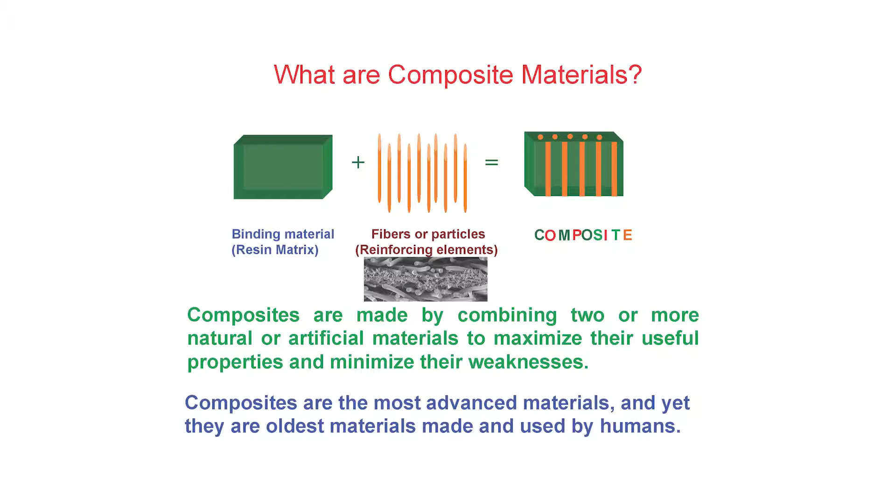First of all, what are the composite materials? Composite word is the composition. So basically this is the composition of a binding material, which may be like a resin, most probably polymer, and different kinds of inclusions, which may be fibers or particles, which make the composite. So they are made by combining 2 or more natural or artificial materials in order to maximize their useful properties and minimize their weaknesses. And of course they are advanced materials, but yet analysis shows that they are actually the oldest materials humans used in history. And I will show you several examples.

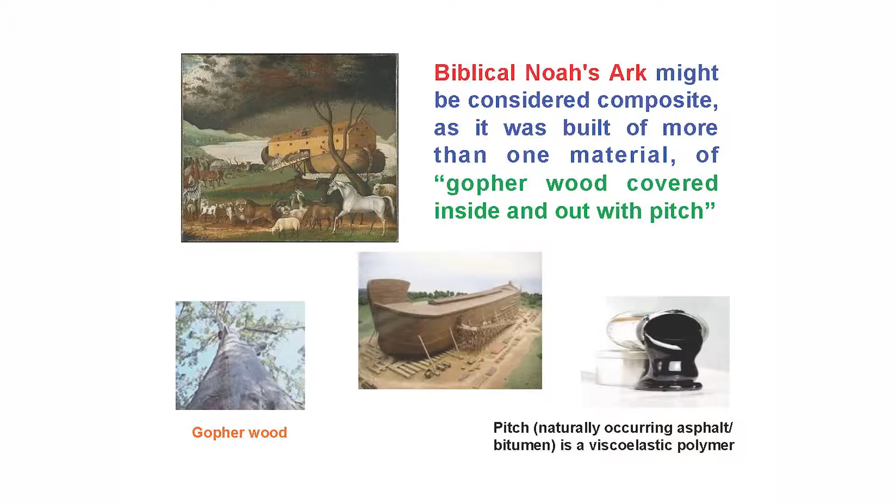Now, interestingly enough, I spent some time in Italy last spring, and I was at the University of Bologna talking to different people, including philosophers and historians of religion. They told me, check the Bible. What about this Noah's Ark? As a matter of fact, the Bible says that Noah's Ark was built out of gopher wood, covered inside and out with pitch. Now, this is wood, and the pitch is basically a viscoelastic polymer, a natural viscoelastic polymer. So basically, Noah's Ark, if it was built, can be called a composite structure.

Moreover, an interesting thing about the Tower of Babel. As a matter of fact, what the Bible says is literally the following: Come, let us make bricks and burn them thoroughly. And they used brick for stone, and they used tar for mortar. So basically, it was not a stone structure, if it ever was, but it was actually a composite structure made of bricks made of composites plus the tar. So pretty much a modern type of composite structure. All right, so let's get now to our nowadays advanced composite materials.

So today, let's start with classification. What types of composite materials exist? The first type is called laminated or laminar composites. This composite material consists of two or more layers of different materials that are bonded together, right? So that makes a laminar composite.

Another type, fiber reinforced composite. This is material with chopped or continuous fibers embedded or bonded by a binder material, which normally we call matrix. So matrix bonds fibers, either chopped or long fibers.

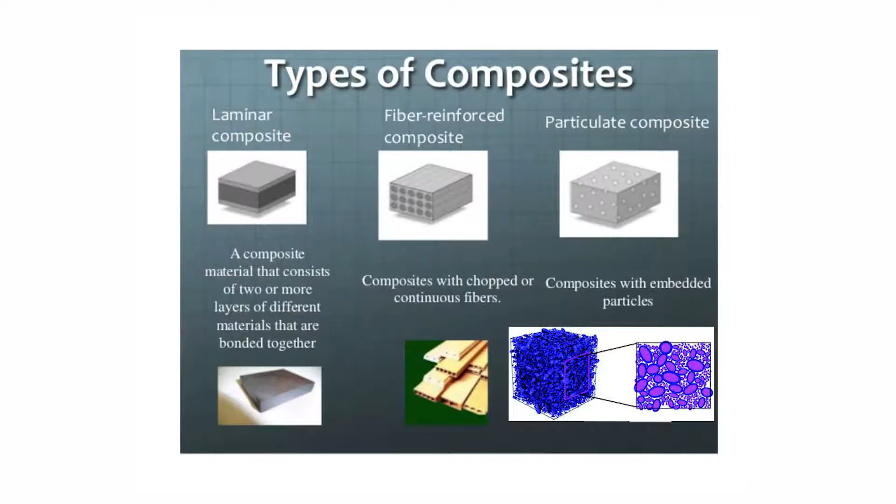The third type is particulate composite. This is, again, the binder material with embedded particles. The shape of particles can be pretty different. They can be randomly distributed or regularly. So to summarize, any kind of composite material, generally speaking, will belong to one of these three classes.

Apart from that, there are tons of different thin-walled composite structures, which I want to put separately, because as a matter of fact, they can belong to each of these three parts. They can be laminated, they can be fiber reinforced, they can be particulate. The thing is that they are thin. So the thickness is much smaller than the tangential dimensions.

There are some mechanical models which allow us to calculate overall mechanical properties of these laminates without big difficulty, and they are pretty practical. They are used almost everywhere in our modern society, starting with aircraft, which we will talk about separately in more detail. They are used in cars, in boats, in bikes, and even in some kinds of armor protection.

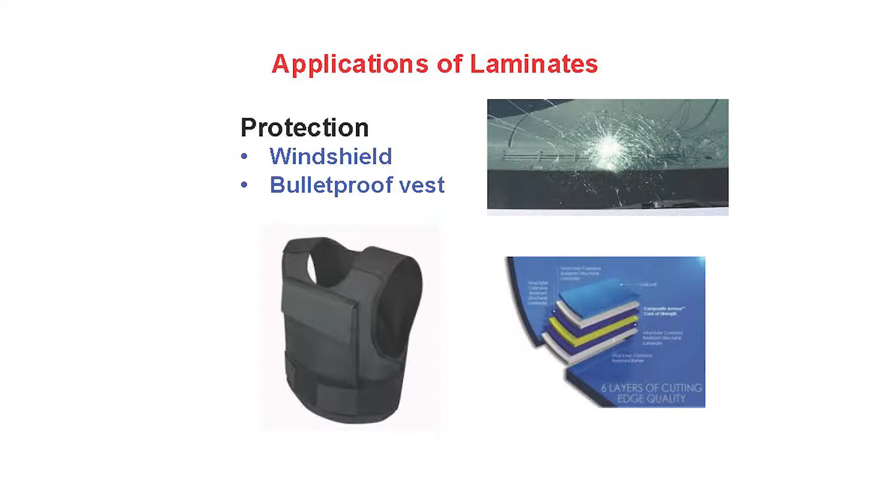Similar thing with windshields. A good windshield, which any car has, is a really good laminate, which again has a lot of protection against breakage, especially against bullet penetration in the case of military cars.

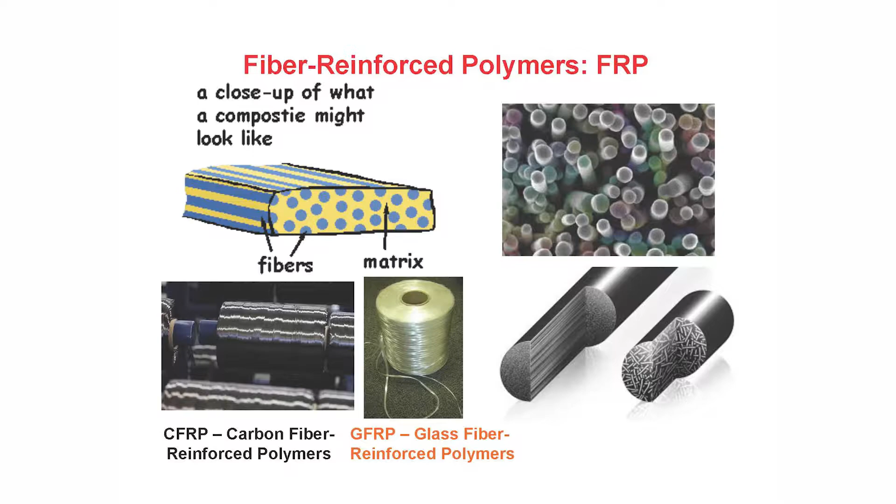So what fibers? Well, the most typical fiber is glass. So this is glass fiber, the mandrel with the glass fiber, and the material will be called GFRP, glass fiber reinforced polymer. This is carbon fiber, it's black in color, and CFRP stands for carbon fiber reinforced polymer. Glass fiber is cheaper than carbon, but carbon has some superior properties for certain applications.

Now, being in Brazil, it's especially important to mention that a lot of fibers are actually, or can be, made from natural materials. And I know that in many Brazilian universities there are special teams which work on developing natural fibers and making composites of natural fibers.

The most used plant fibers are cotton, flax, hemp, aloe, jute, bamboo, banana, coconut, and curauá, which is particularly a Brazilian product, creates fibers which are successfully used in composites.

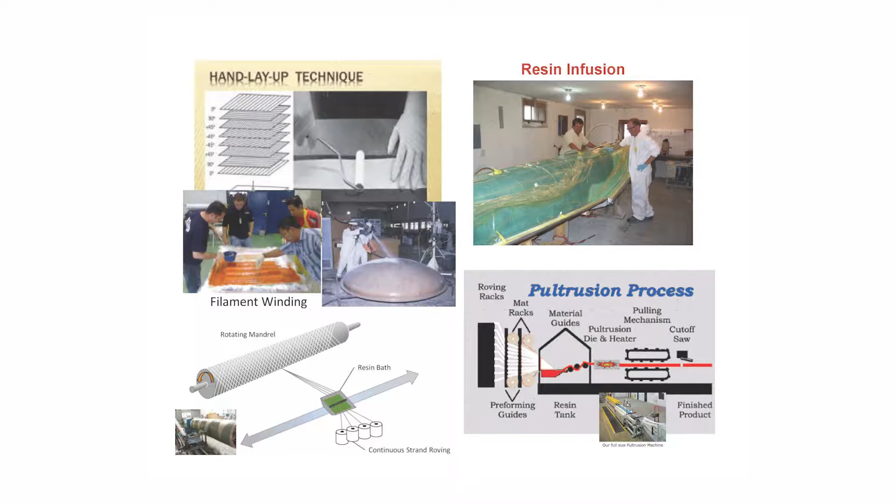And finally, what I want to show you is the pultrusion. Pultrusion is when you actually pull the fibers wet in resin through the pultrusion die, heat it to a certain temperature, which solidifies the resin, and you can get any kind of profile of material coming out there. Not necessarily axisymmetrical, as a matter of fact, any kind of prismatic body. Well, let us look how it works.

So let us start with this manual layup. As you see, it can be a very large volume operation. An autoclave can be really huge. So basically imagine that you can put the whole fuselage of an airplane here. That's probably the reason for this size. Or you can put a pressure vessel designed, for example, for maybe even a nuclear plant, or a jet engine. A jet engine cannot be that big, of course.

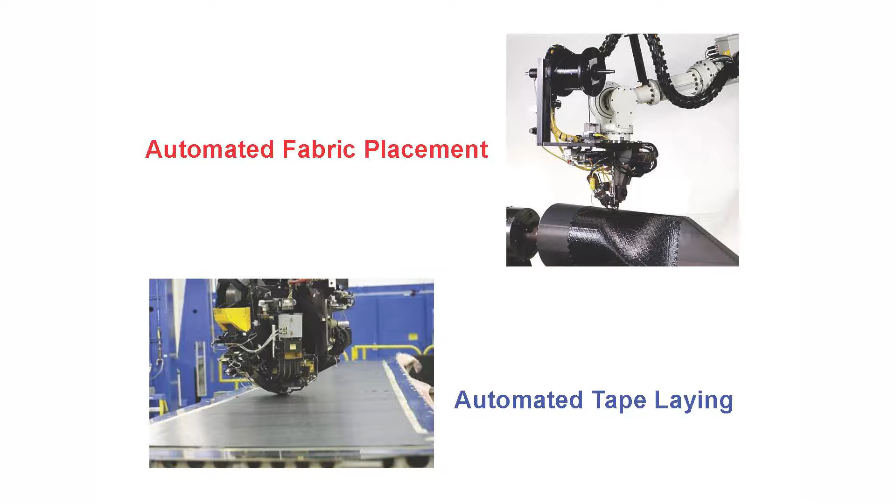All right. Now, there are different kinds of technologies which allow you to make the fabric placement in a very specific way to optimize the strength of that fabric in certain directions. According to that black color, the fibers here are carbon. And here you can do the tape laying, so you make that material that you can later use, for example, for hand layup with the resin, and after solidification, you will get a very good quality composite part.

Now, let us start with the filament winding. And as I promised, I will show you some educational movies here. Hopefully, technology will be friendly. So this one doesn't speak and doesn't play music, but it has comments here.

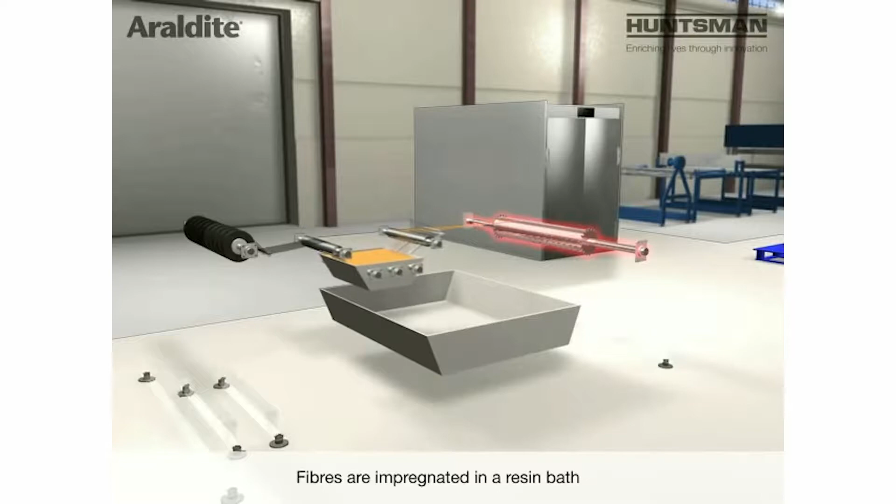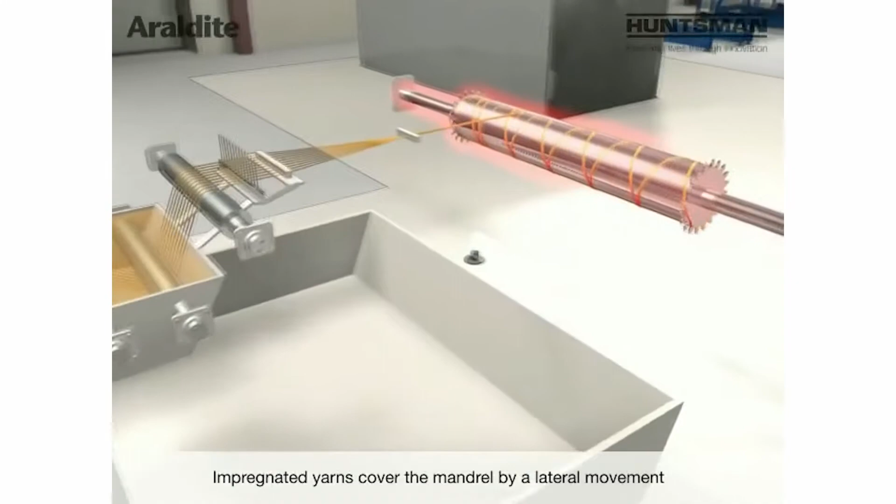So here are the fibers. Here is the resin bath. You will see in a minute how the fibers are impregnated in resin, because they run through that resin. And resin is very liquid here. Now, some more interesting technology will allow you to place fibers not just straight and stupid, but also to make a certain pattern which you want to have right here. And then that mandrel rotates, as you see here, and the machine moves.

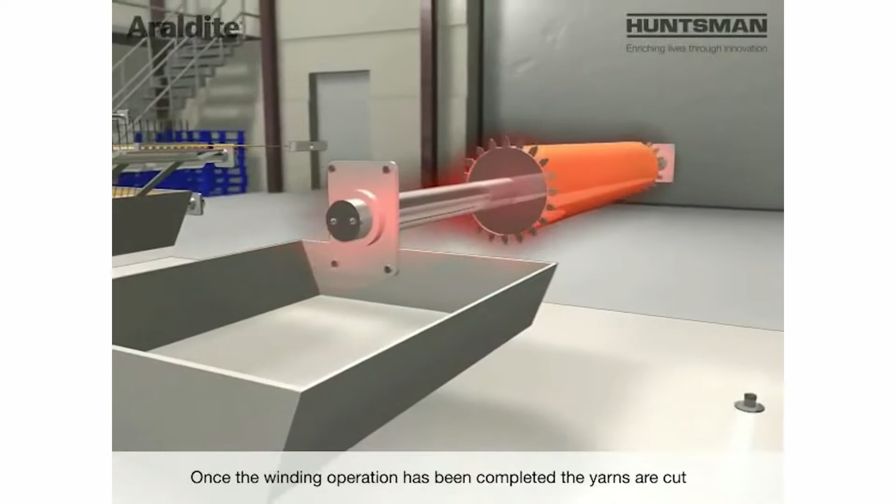Regulating the relative motion, the speed of how that machine moves, and the angular velocity of the mandrel, you can actually regulate the angle at which the fibers are wound on that mandrel. So basically, you are making a material extremely strong, because you can make the optimally designed distribution of angles at which the fibers are wound on that mandrel.

Then, in this particular example, you had a heated mandrel, and then you put it also under that infrared lamp. For certain kinds of polymeric resin, that's the way you cure the resin. After that operation, you also put it in the oven, as you see, to cure. And then you keep that at a certain temperature for a certain time. And then basically, the technology comes to the conclusion.

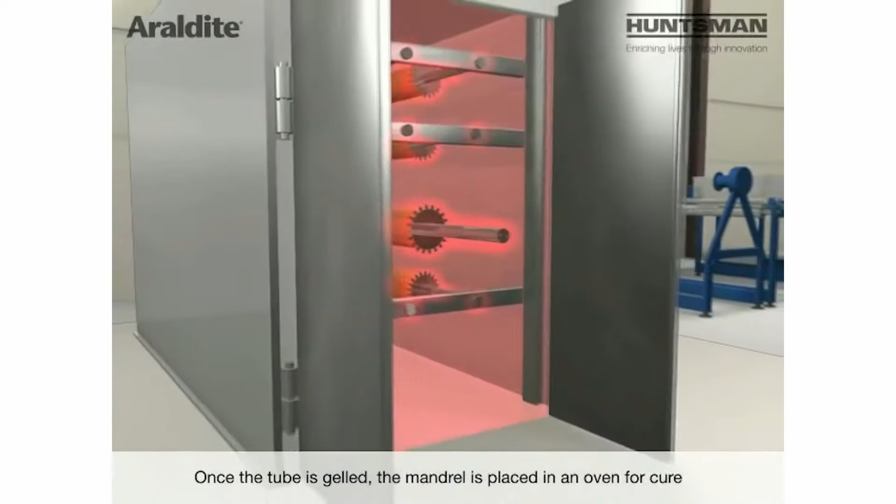And what is beautiful about that? What you get as a result is the part which is ready, completed. You don't need to do anything more but take it out, pack it, and ship it to the place which needs it to put it in a certain kind of device or structure. Well, that was a good example.

Now, another one. That has music, and it's funny. It is very informative. They give you lots of details, but it's a little long. We'll see how we can sustain that if we want to see all of it, or I will cut it somewhere there.

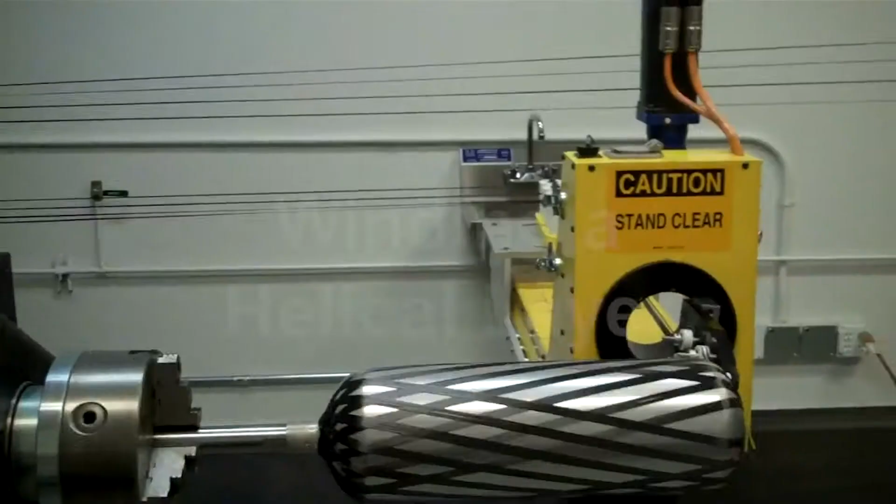Well, pay attention that this machine makes not just a pipe-like cylinder, but actually the pressure vessel with caps. So it's completely surrounded by this filament-wound composite material. So basically the final product will be ready in maybe half an hour, plus the curing process, right?

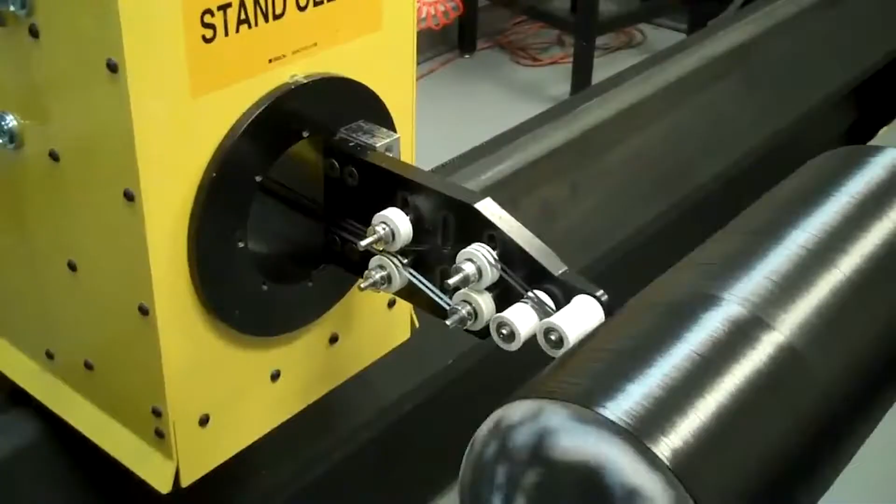Now it changed the angle very much. Now that's interesting. Then it puts the hoop strengthening there. So that pressure vessel they are making will be technologically top strong. As you see, they are also using the best quality carbon fibers.

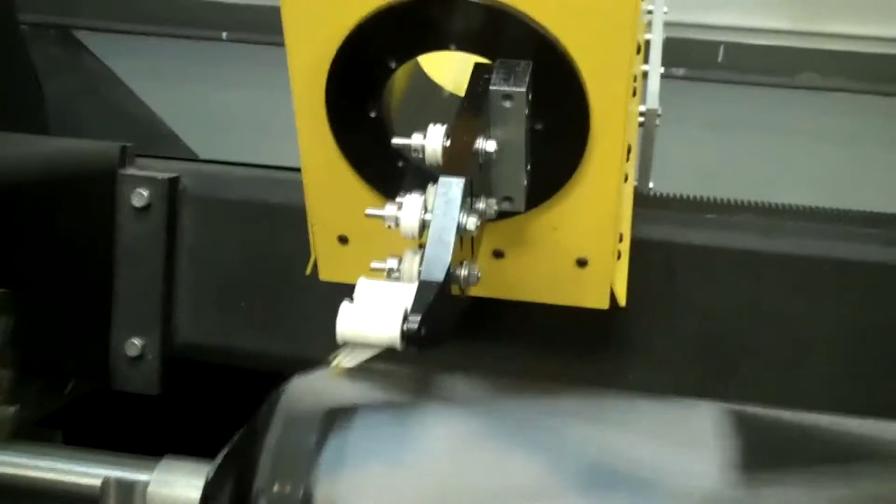It's a very detailed video. Now I want to show you one thing that will make you happy, because it is Brazilian technology. Here are glass fibers, evidently, but look at the size of this mandrel. It's probably a huge pressure vessel or tank, maybe for oil or something like that.

Now here they actually prepare the mandrel. Put the liner. I want to show you when it starts the winding process. It's almost there. Yeah. So as you see, it's a wet resin, it shines in the light.

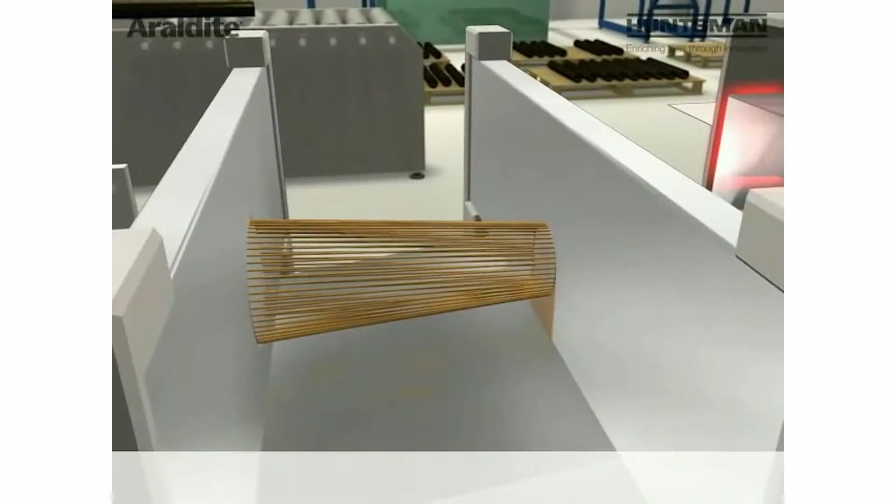In this particular situation, they are making a pipe. So they put the fibers in a kind of round-shaped woven material. Then it will be solidified with the resin, and you will see the result very soon. So this is the pultrusion die. Now look, it shows you how the resin is heated and quickly cured. So here is the physical-chemical process of curing the resin.

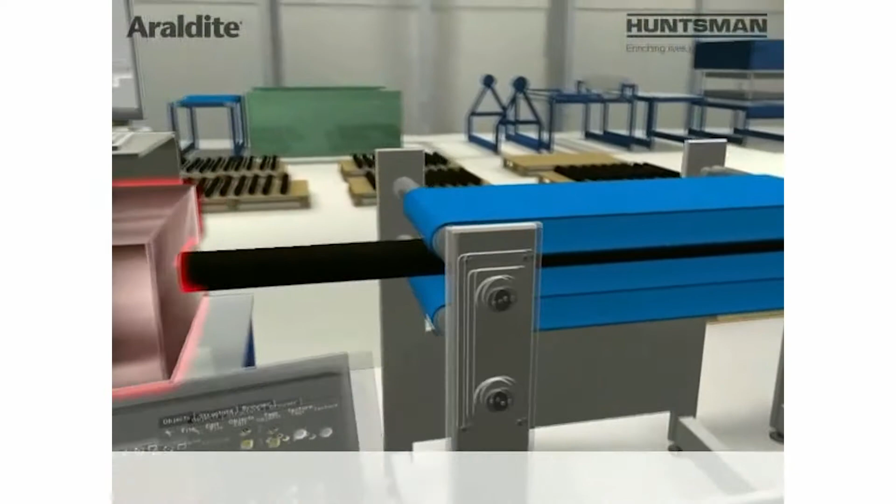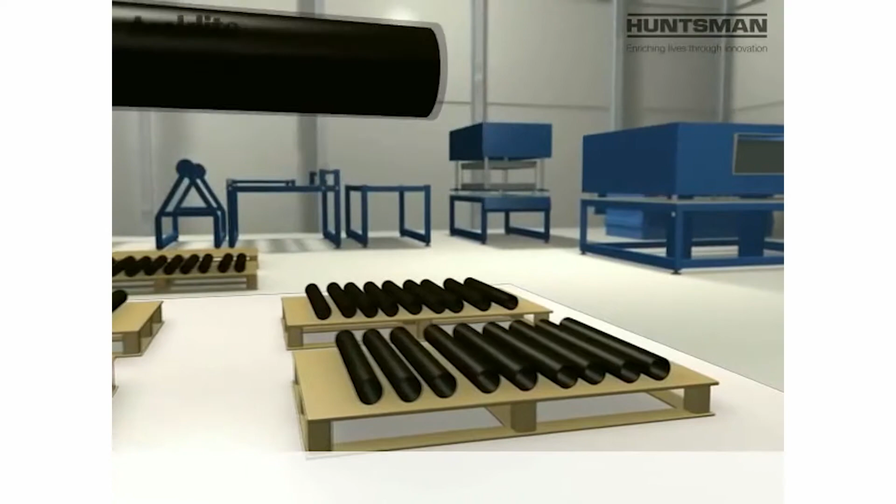And then here, the structure is already done. It's made. So now this way of pulling is called caterpillar. A caterpillar basically means that you rotate it and, with friction, it pulls the part forward, right? And then the cut-off saw, you can just measure how long a part you want to make. You can make it extremely long if you need. Well, you also need to think about transportation. And then you cut them, you put them together and ship.

Now you will see a slightly different process. Pultrusion is the same, but you will see a different type of pulling mechanism. So these are fiberglass rovings. And you also have fiberglass mat here. So you will see why.

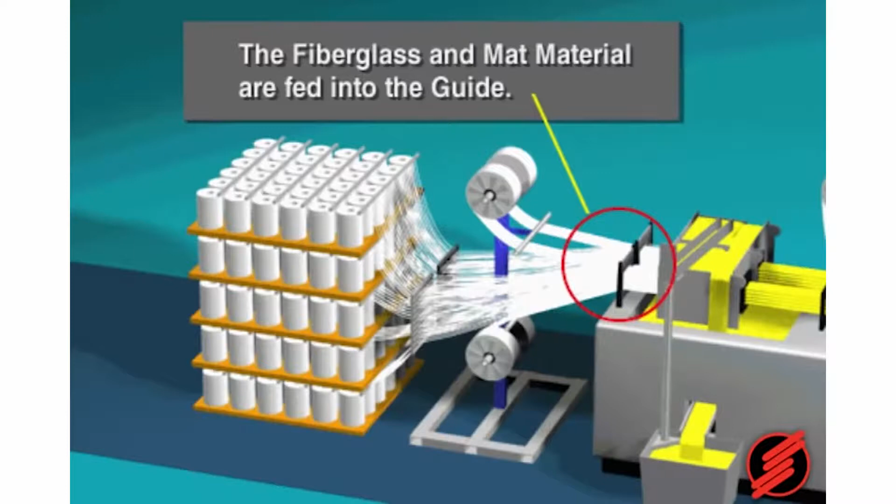So as you see, the feeding is quite complicated. And this is a different type of pulling mechanism. It's like a stepwise one. You pull it, as you will see now. So it's not a caterpillar, right? So this is the guide. Fibers are impregnated with resin.

You see here, you don't have a resin bath, but rather some kind of container in which the resin is supplied under pressure, and it impregnates all this combination. Pulled out. And you can make any kind of profile of this structure. Here is the cut-off saw. Now it will show you how the process is going.

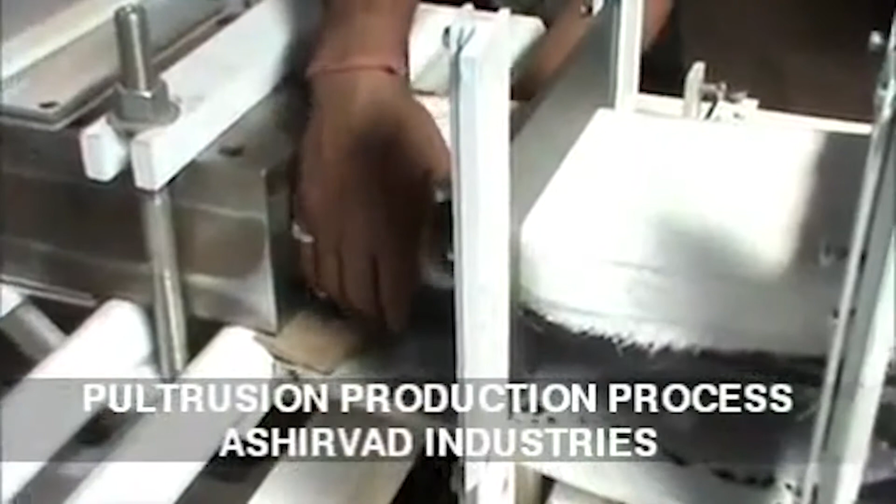Another interesting thing I found, a different one, and the last one about pultrusion. Quite different. Look here. Instead of fibers, they use some kind of already woven fabric. In my opinion, it's made of glass fibers. It looks white, and these particular fibers look like glass fibers. But look what they are putting inside of the die. Not singular fibers, but that kind of, let's say, mat of already woven fabrics, and pretty thick.

And resin is impregnated somewhere here. So basically that's the resin, right? Under pressure, it gets all through the material. And then as you see, these are the heating devices. So you have 3 zones of temperature. And then the result coming out. Well, this is a high-performance composite beam coming out, right?

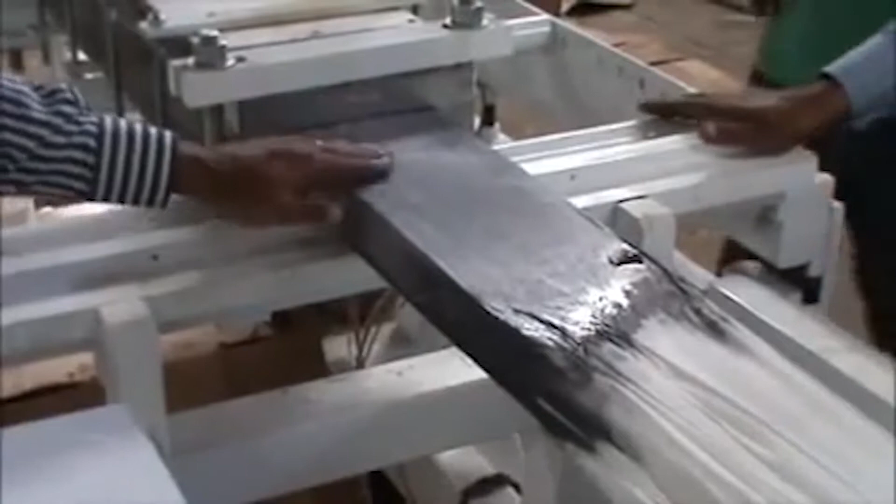And as a matter of fact, here, it is already finished. That's the final product. You cut it somewhere here, and then you ship it to maybe a construction site or wherever you use it. Now, of course, it is a solid rectangular shape.

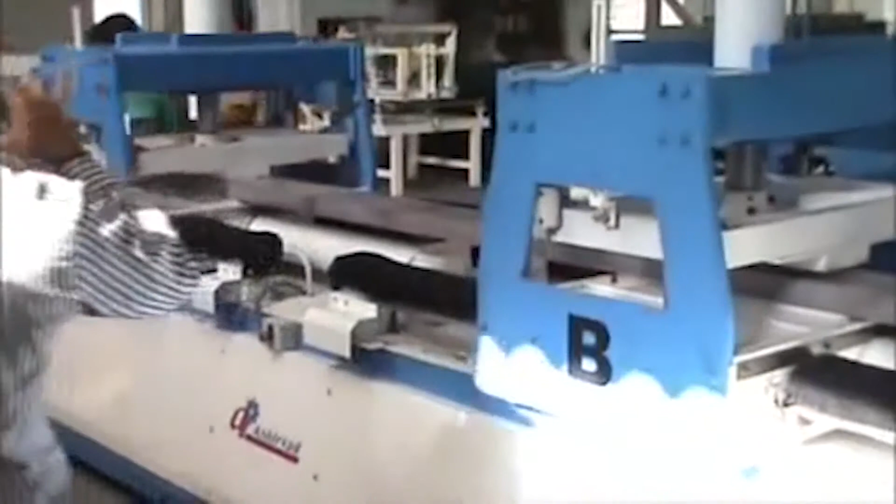There is also the device which is pulling that thing. And as you see, it is pretty bulky because in that particular case, the pulling force must be pretty high, considerable pulling force. Much higher than in the case of that first example of a round pipe made of several fibers. So therefore, as you see, that mechanism is really bulky and very strong. And here it comes, the product. All right. So we got the pultrusion.

We already did that. Now I want to show you maybe 2 more examples. This is about hand layup. You remember I said that I will give you more details. I know that some of you want to make airplanes, right, or boats or something. Well, how you will make the part you wish to make from composite, I will show you in that first example. How to make a fiberglass boat.

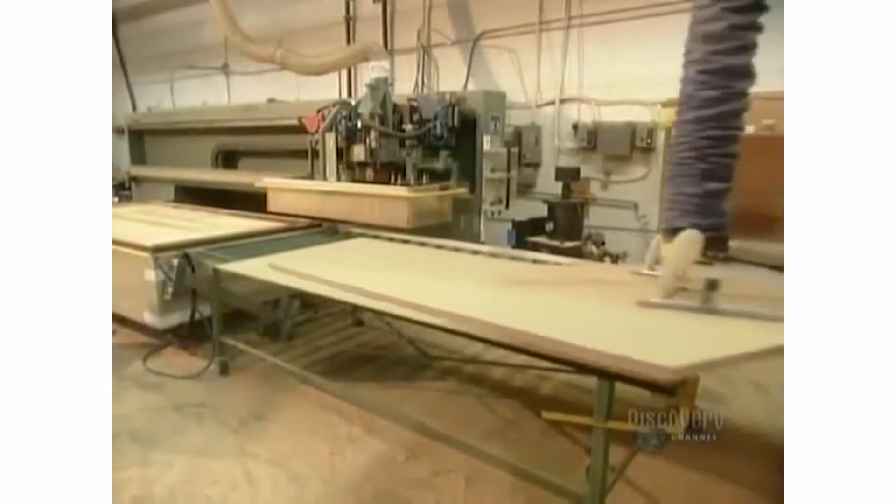Works. They're sleek, they're fast, and they're fun. Fiberglass boats can jump waves and turn on a dime. The fiberglass body is low maintenance and durable, so these watercraft don't deteriorate the way wooden boats can. A computerized saw cuts out the wood pieces they'll use to build the mold for the fiberglass boat.

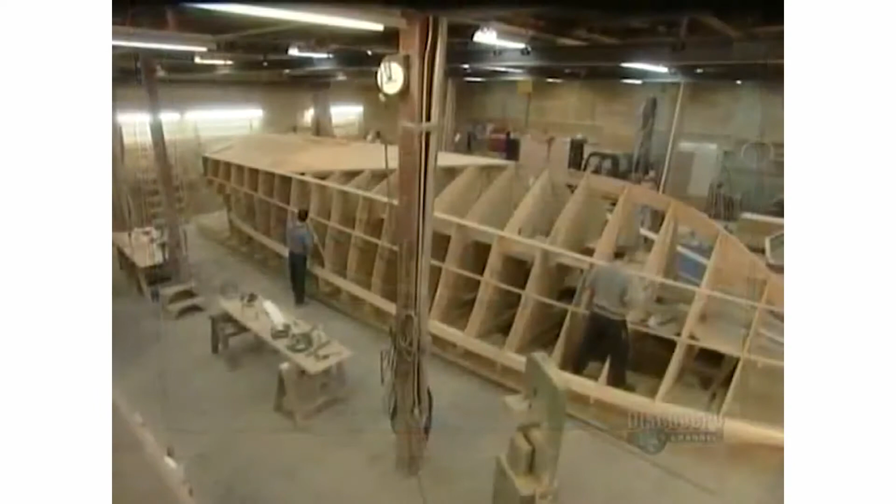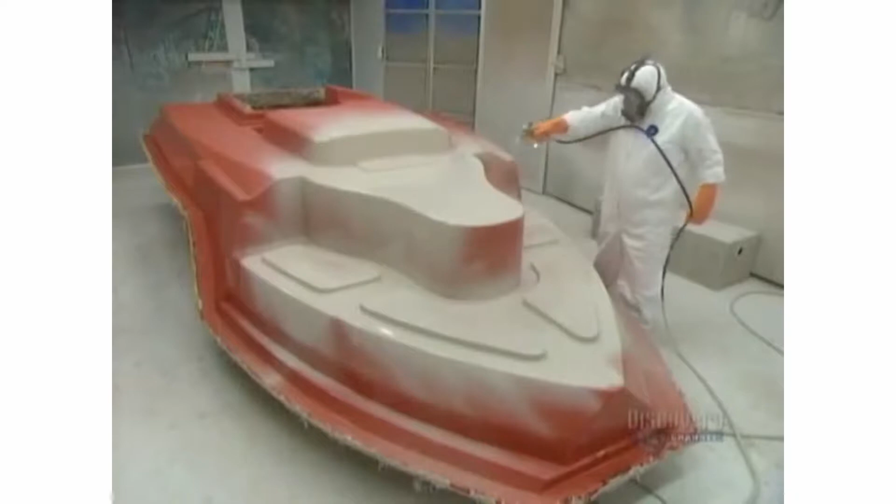It takes a team of artisans about 15 months to design and build the mold. They first construct the frame. Then they build up the shape out of fiberglass. The mold must be perfect in order to cast a boat that's free of faults and defects, so they painstakingly work on the mold's finish in particular, coating it in a special high-resistance paint that will withstand about 8 years of castings. Once they've finished the mold, they can begin casting the fiberglass boat.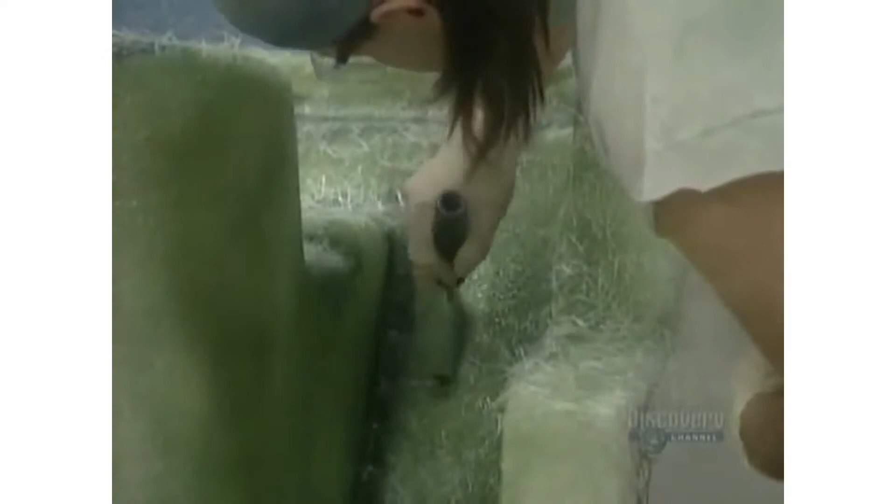The equipment feeds just the right ratio of fiberglass to plastic resin. Fiberglass is glass in the form of very fine, flexible fibers. They may look fragile, but those fibers are stronger than steel, and they won't burn, stretch, or rot, so they make perfect boat-building material. Workers make sure they roll the fiberglass into every nook and cranny. This is critical, because if they don't apply the fiberglass thoroughly, the boat will have structural defects. As heat within the fiberglass builds up, it hardens.

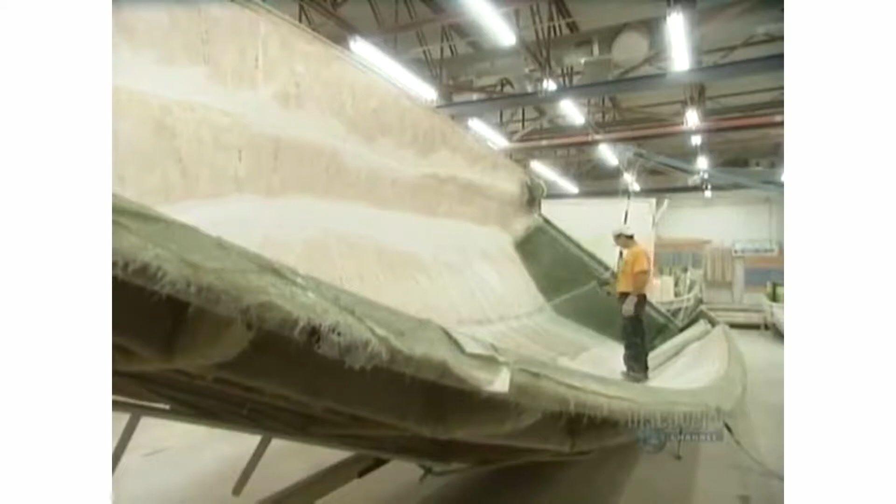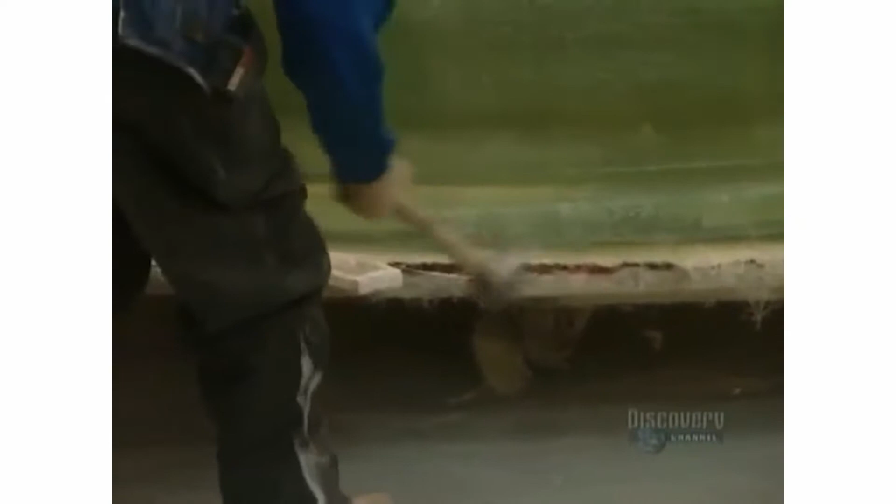Next, they roll on a material called roving. It reinforces the fiberglass and makes it more rigid. They also install wood at the spots where they'll later mount equipment. They coat the wood with fiberglass to protect it from moisture. After about an hour, it's time to extract the casting from the mold. They use a lever system to lift out the hull.

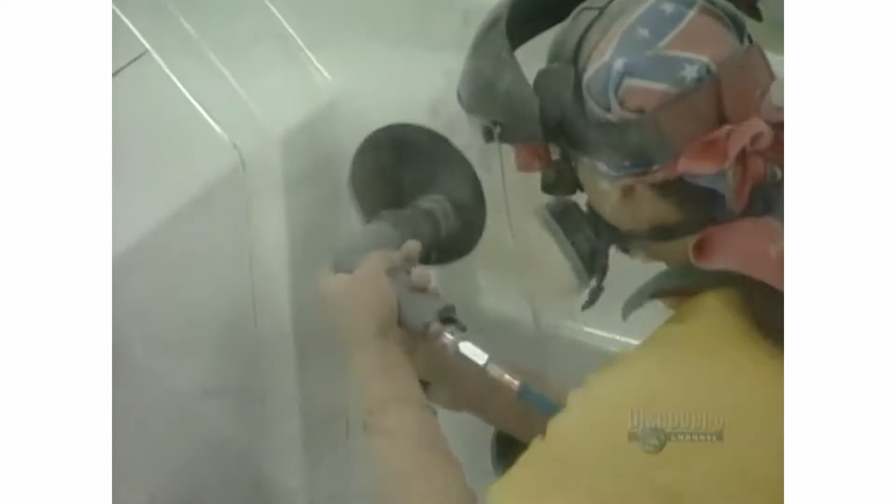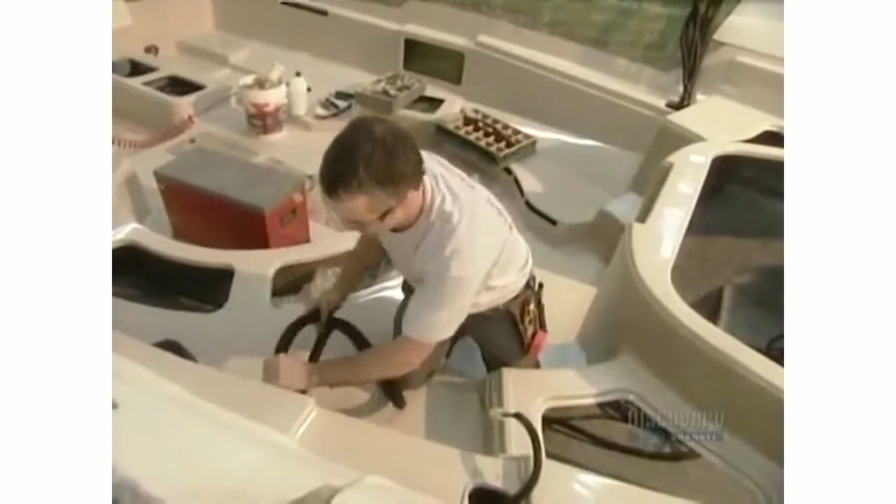They cut out holes for the mechanics. Then they install the boat's deck. They install the motor and the electrical wiring for the mechanics and plumbing. The boat truly takes shape in the final assembly. They put together the upper part of the boat, called the shell, and the inside, called the liner.

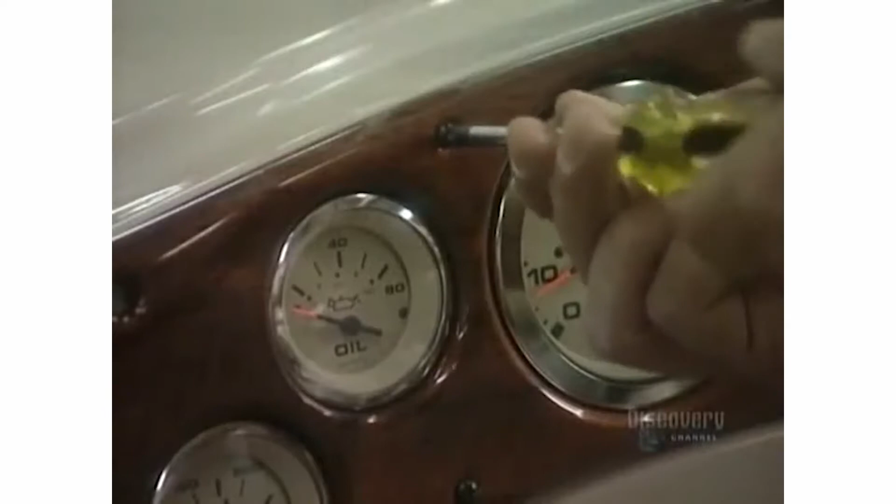They install the furniture, then certain components by hand, such as the dashboard. Well, and they sell it for 2 million reais, right? So basically, you can do it at home, right? I mean, in terms of technology, there's nothing that you cannot do yourself.

Well, size, of course, and scale can be different, but the idea, that's what I mentioned, is that the hand layup is the easiest to implement for any particular application.

You are not very tired. I have one more video. You want to see it? It is a little long, so I will be cutting it off because I think it's, you know, too many details, but it is about resin infusion. And by itself, it is an interesting thing. Let's see. I think it's the last one I prepared.

So this is just a profile. It is not the product. That's a plastic profile. And it's a kind of labor-intensive thing in terms of how many steps they use to put that vacuum bag. But if you look at that video, you will agree with me that this can be done also with a little training and instructions. You don't need to be highly qualified, just need to be accurate.

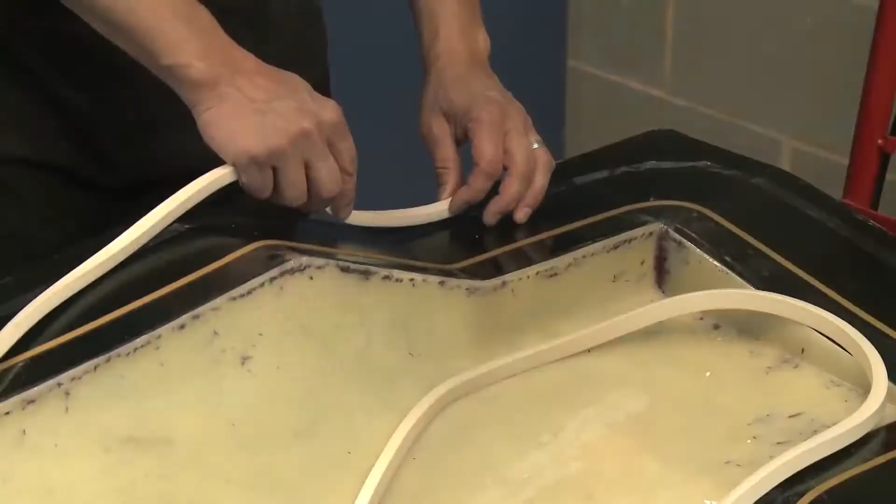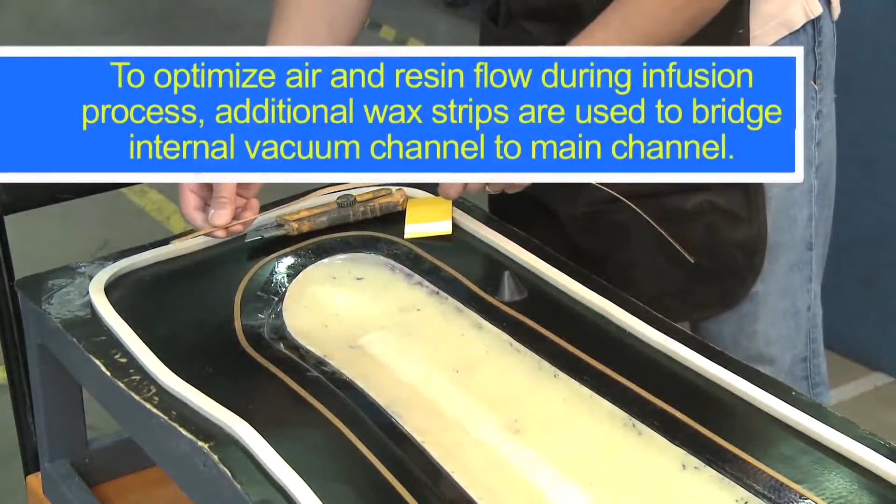So they put that thing which will keep it in vacuum. You will see the vacuum channel allows air to flow. Yeah, that's interesting. Resin runner. So you have somehow to supply the resin inside, right? Look what they're doing.

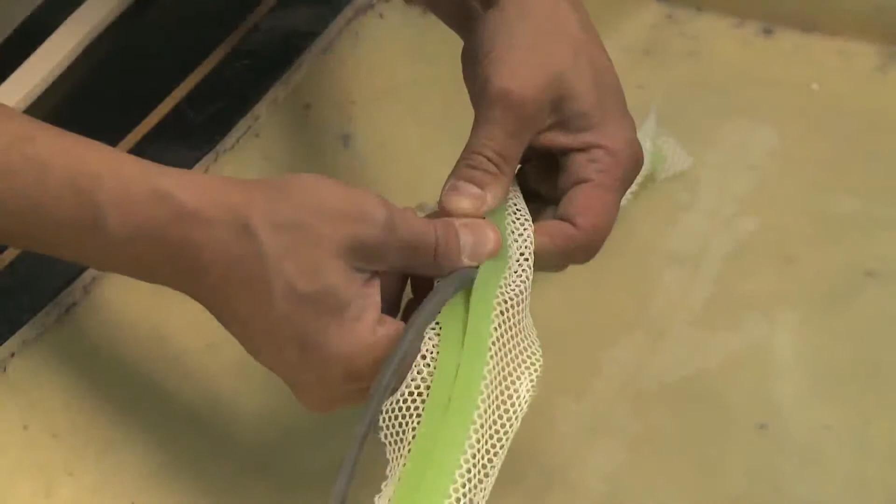So it's just a flexible cord they insert in that protector, and then they glue it. Double-sided tape, so not high technology, just to tape that thing in.

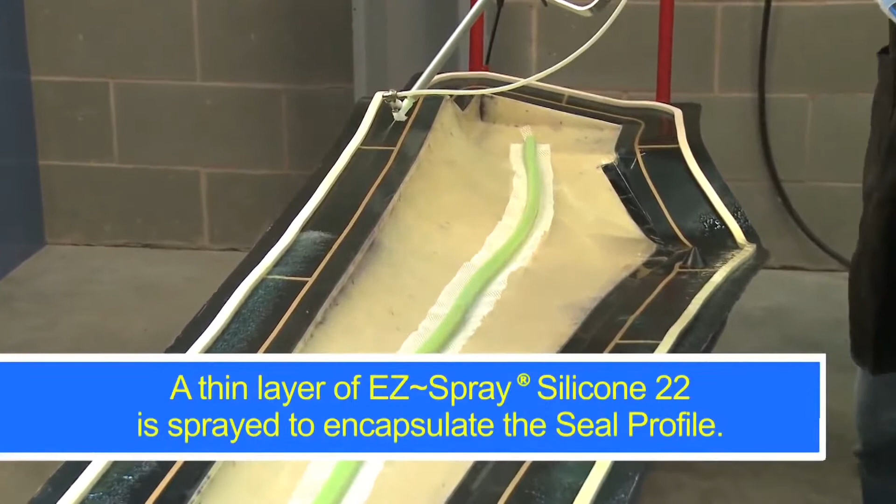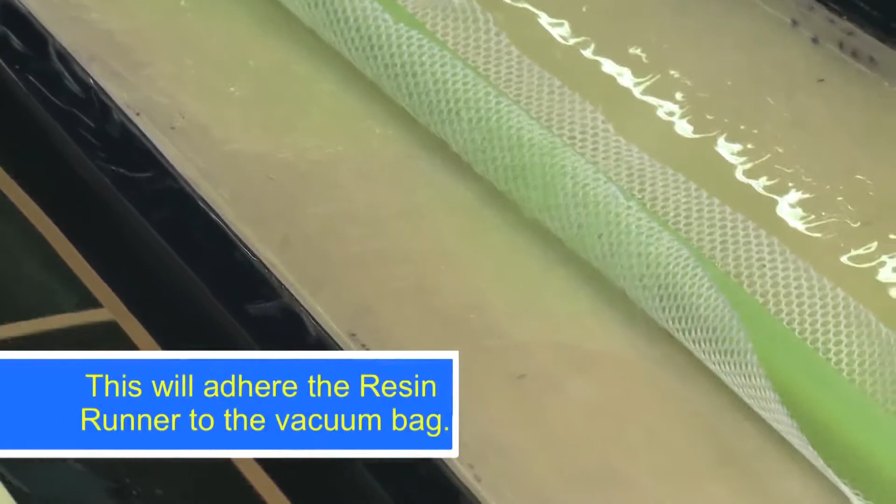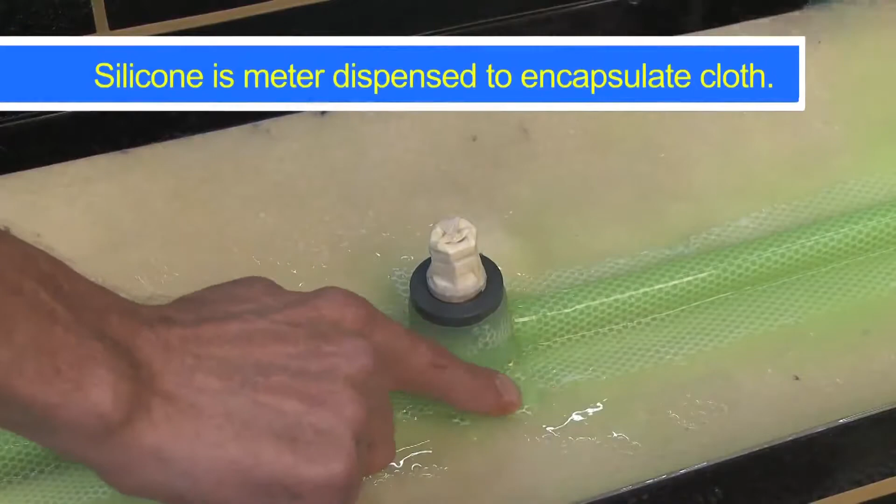That is the dispensing machine of silicone, so they put the silicone around to ensure a proper seal, because you need to have a vacuum there. Then you spray the rubber. The resin runner. It's pretty much the same thing they're doing.

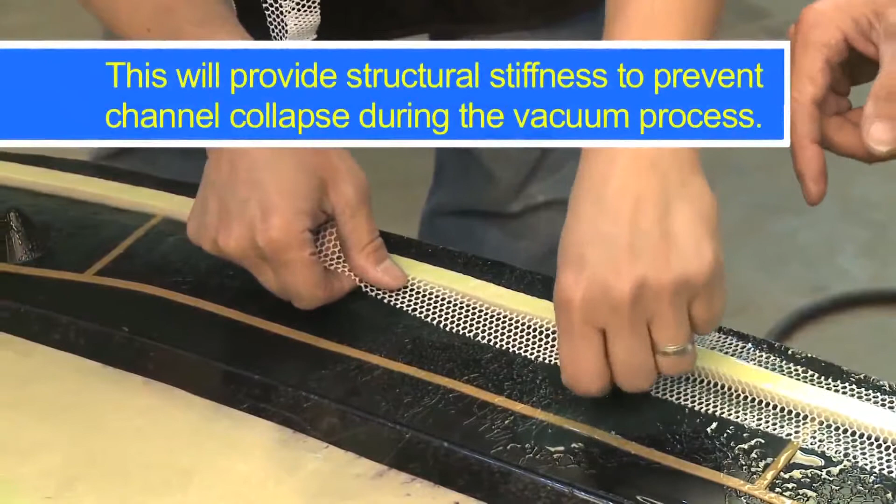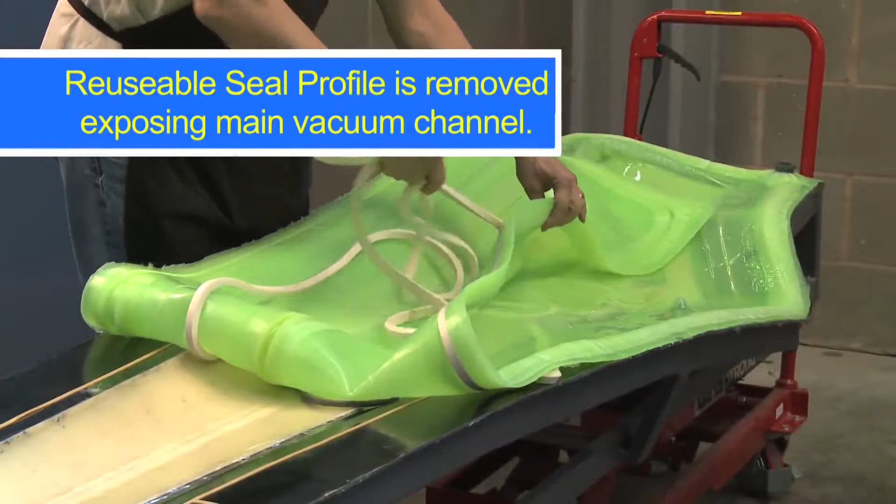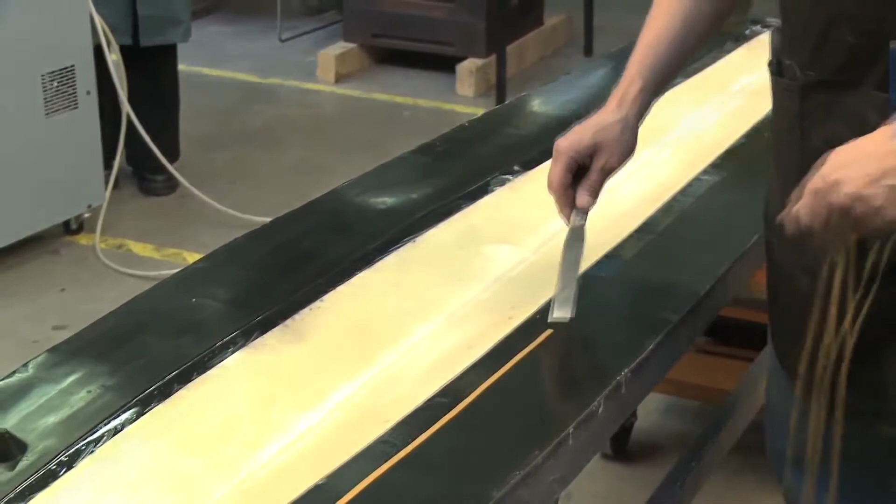Of course, they cure the resin. Now they will start making the part. Yeah, here they are putting that bag. So remember, they made it especially for that.

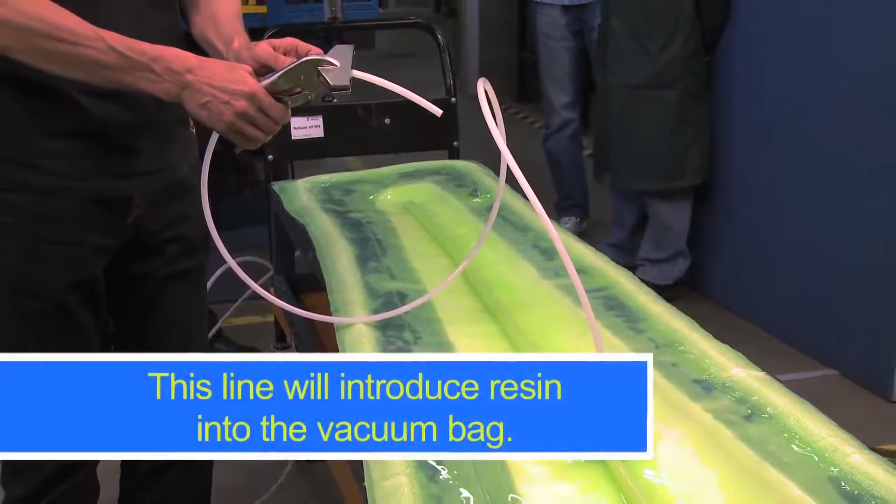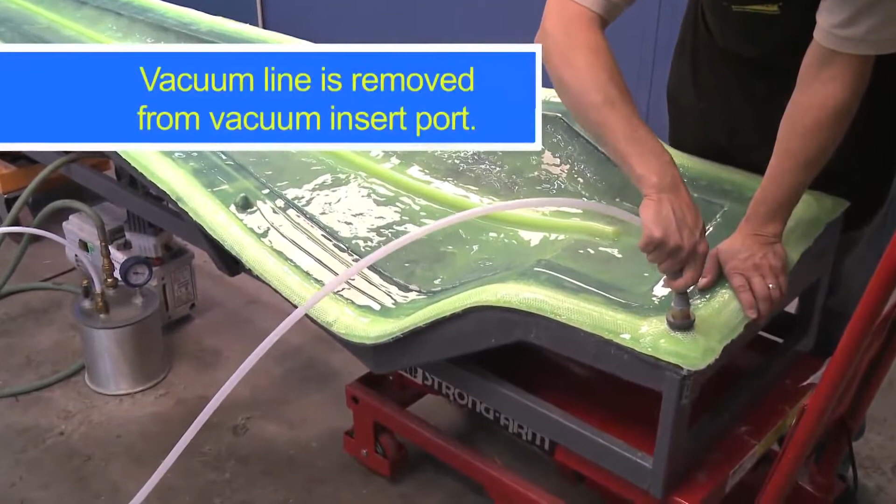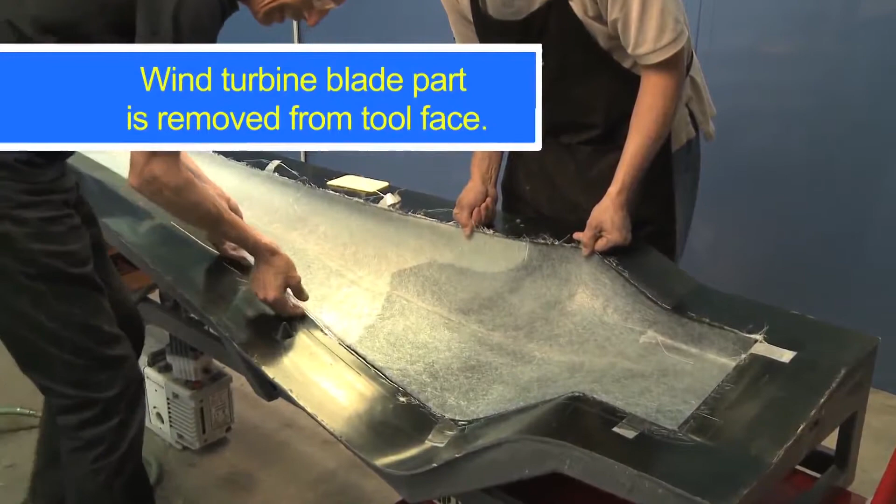Okay. So the resin flows in that vacuum bag from that primitive pot full of resin. When it is full, they stop it. They'll remove the bag. All right, so that's done.

Okay, I showed you the details on this manufacturing. Now let's get back to the presentation with slides. So where are composites used? First of all, composites started to be used in military, especially in aerospace applications, for two reasons. Number one, they had money for that. It was very expensive. And number two, it was extremely high technology, so they needed the best materials.

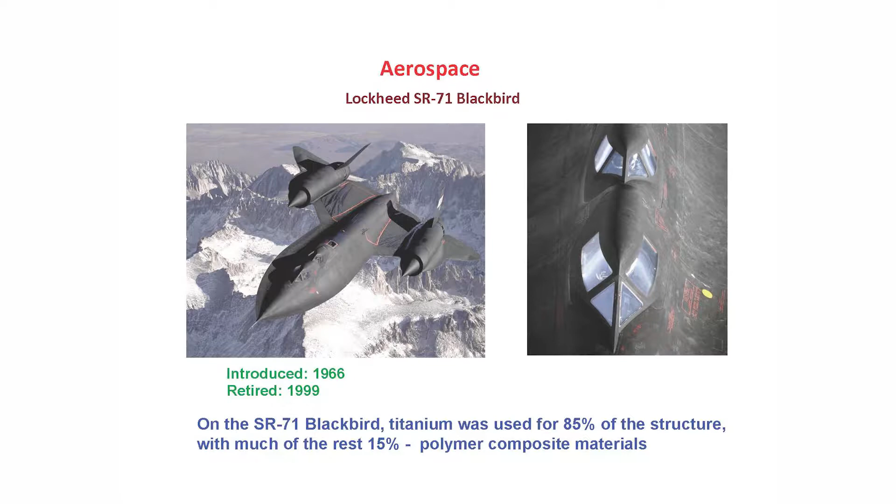Now, this is a fantastic machine, a military plane, the Lockheed Blackbird. As a matter of fact, it was made in 1966 and worked till 1999. So it's a very early example. If you look, titanium was 85%, while polymer composites were 15%. For that time, it was quite a record.

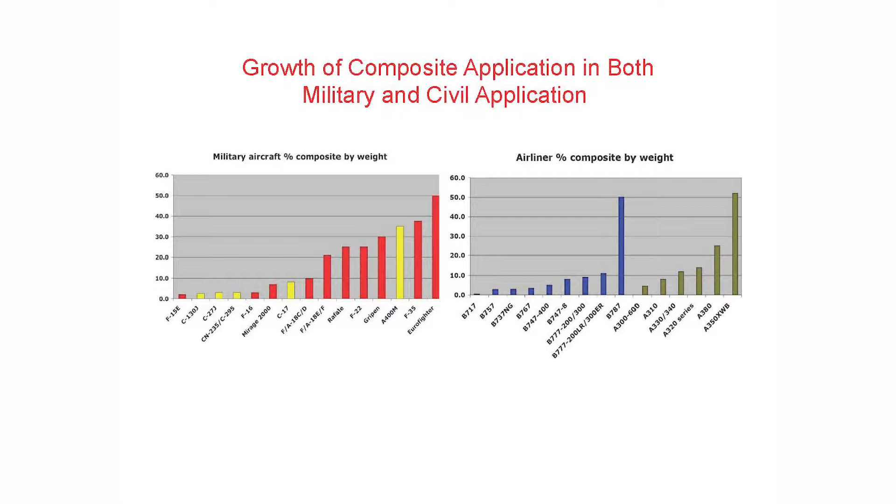Now this is an interesting diagram. That plot shows you the military aircraft percentage of composite by weight. This one shows the airliner. So this is civil aviation. This is military. And you can see the airplanes with the history. So as you see, the last one, Eurofighter, has 50% of composites by weight, right?

Now, if you look, the blue color is Boeing. The beige color is Airbus. So here the Boeing 787 has 50%. Now Airbus, the last edition, number 350X something, has even a little more than 50%. So basically you can see that the trend in military and civil aviation is very similar, except that here the explosion is even more profound. So by weight, the latest airplanes have almost 50% composites.

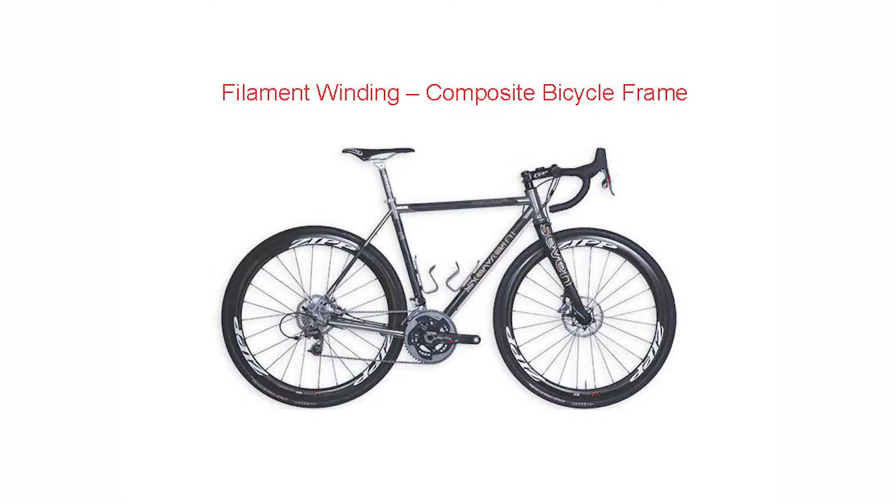So this is a huge market. I think that's the biggest market in the world in which composites will be used, and already are. Now, interesting that not only the frame of the bicycle is made of composites, but, which I didn't know, the wheels. So you can see that this is the carbon fiber filament wound wheel.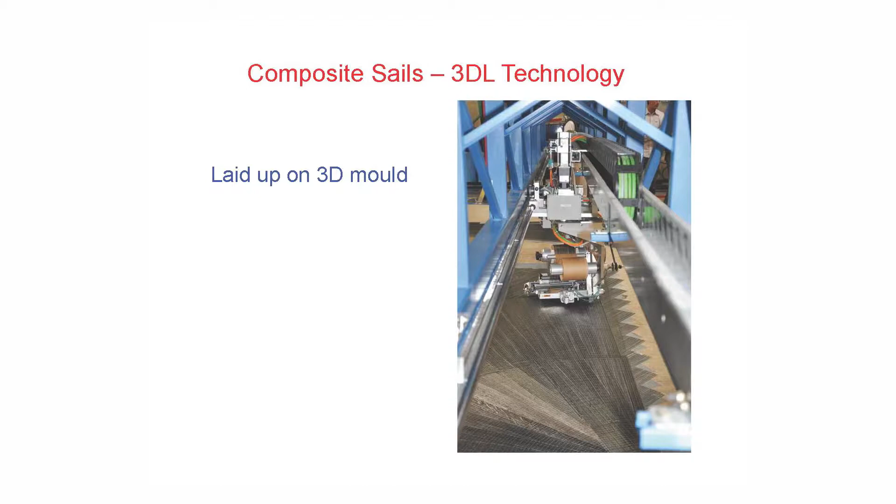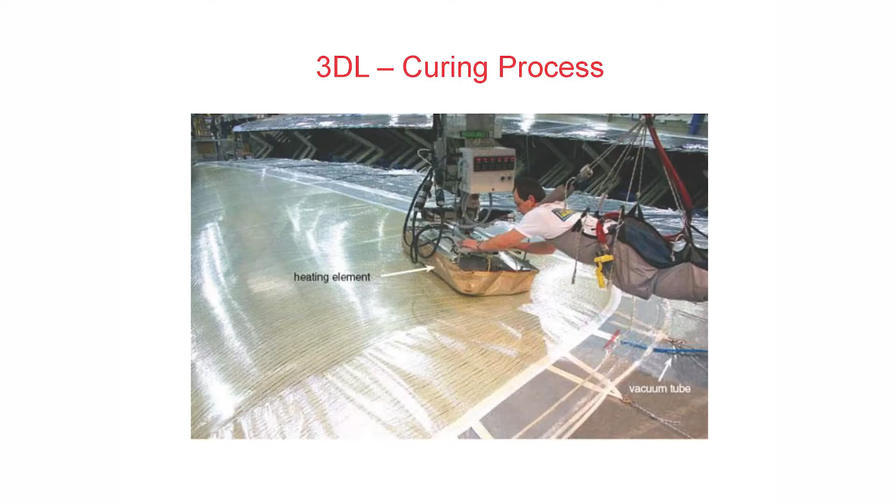How it is done. 3DL, this is the company in the United States which makes this kind of sails. Look here. So they put all of that, hand lay-up, huge size, carbon fibers, the shape optimally designed, the shape of the sail, which is solid, by the way. And then this poor guy is hanging over that sail with the heating element, so he cures the resin, right? Excellent job. Then here is the final product.

Well, I really didn't know about that, but apparently these sails are top notch, and of course they are used for special kinds of yachts which compete in championships. Well, of course, if you have money, you can purchase it for your yacht as well.

Now, some other examples, sandwich structures. Well, low density core, high density facing sheets. That's the secret of the sandwich structure. When your core is wide, that extremely enhances the bending stiffness, not much increasing the weight and cost of the structure. So that's the secret why these are used, especially in aerospace and in marine engineering as well.

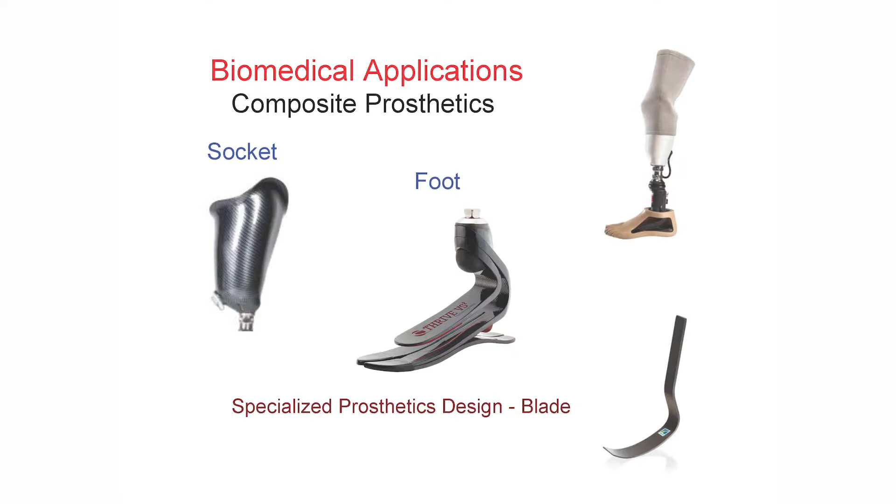Biomedical applications again, so different parts, like sockets or feet, or even specially designed blades for these Olympic runners, and maybe not Olympic champions, but just people who are unfortunate having no legs can use them to run. And

these are the applications. Of course, the downside of composites is that they are vulnerable to breakage, delamination, breakage of fibers. So basically, since the fracture happens mostly inside these materials, to some extent you are not able to see it much in advance, to fix it. There are some technologies, but basically the best thing is to have structural health monitoring.

So basically to insert some kind of sensors which will monitor the, what we say, health, which means, for example, the strain state of the structure. So if the strains are normal, it's okay. If you see that certain places are strained and therefore stress concentrators, that means that some defects are there. So then you can take measures. So that brings us to the topic of smart materials.

So what are smart materials? Materials that have sensors, actuators, and control. So then you have the most difficult and the most comprehensive, let's say, intelligent structure. If they don't have control, then it can be a passive smart structure. It may not have actuators, only sensors. Then it is health monitoring, right? But the most comprehensive is when you have all of them. And there are many examples of that. And of course, we want to follow the idea of living beings, not necessarily humans, which do have all these components in their bodies.

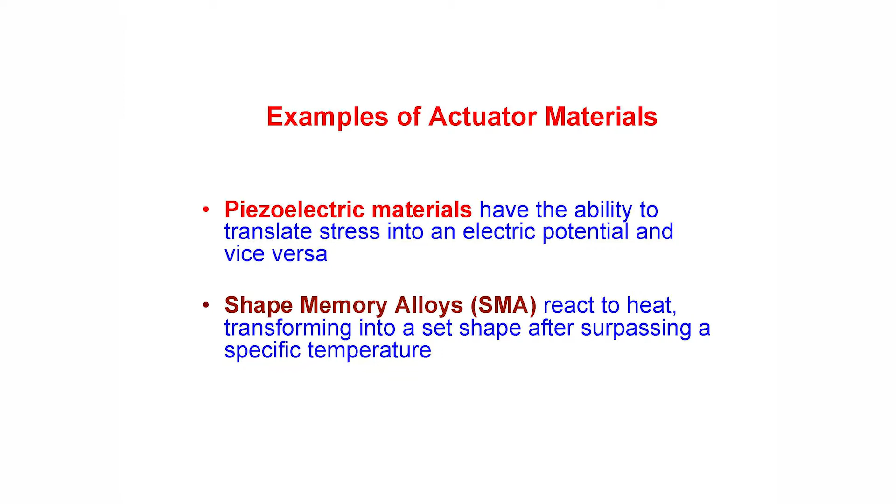There are several types of actuators plus sensors materials. I'll just give you an introduction. So I am talking about piezoelectrics and shape memory alloys. Piezoelectrics, of course, react to electric potential, and vice versa. Shape memory alloy reacts to heat, changing the shape.

Shape memory alloys, and you have one of several world leaders in shape memory alloys here in this room, so I will not talk about that more than I need. But for the students, basically what it does: the original shape, then you can deform it, then you heat it, and it gets back to the original shape. So the heating, which may be done by electric field as well, changes the shape, therefore it is an actuator.

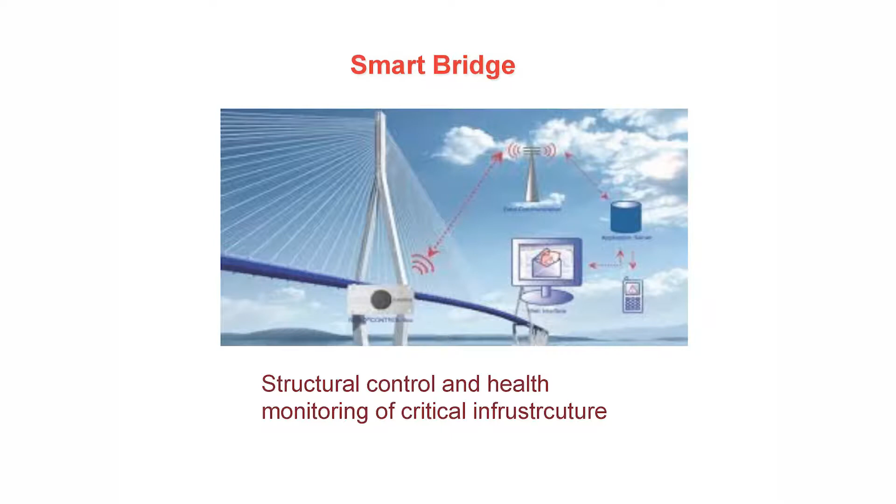In this particular application, I was personally involved. We did work on embedding fiber optic sensors inside FRP reinforcements, which would be put in bridges, so that sensors are inside this FRP reinforcement in the concrete. They signal strains, which go to the headquarters, to the monitoring station, and in case something goes wrong, the team goes immediately to that bridge and takes care of it. So this kind of overall system is still ongoing, but it is already very much based on certain achievements that are already in place.

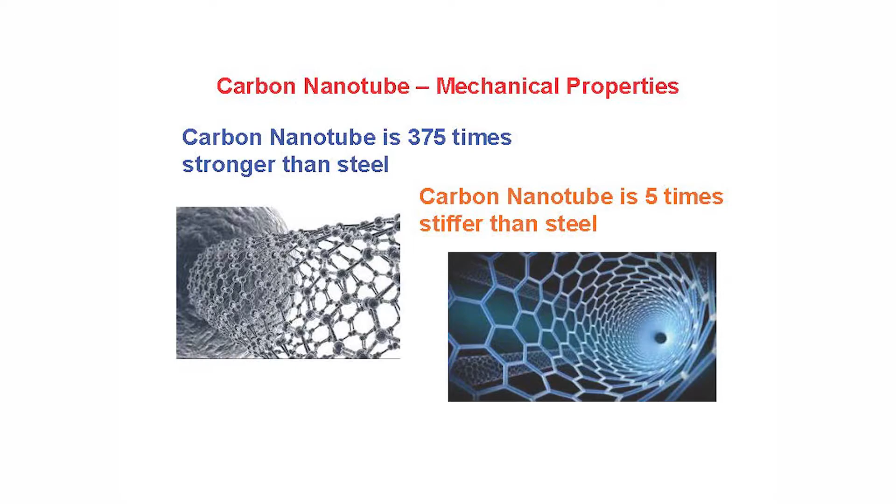To finalize, with respect to money, it is of course relative, but it says that by 2017 the market of composites will be $35 billion. I think it really underestimates it because it's impossible to count budgets for all composites used. But nano-composites are developing extremely quickly, with a 24% growth rate from 2014 till 2019. Just to summarize what we did, we learned about advanced composites, methods of manufacturing, and use. We spoke a little bit about smart structures and nano-composites.